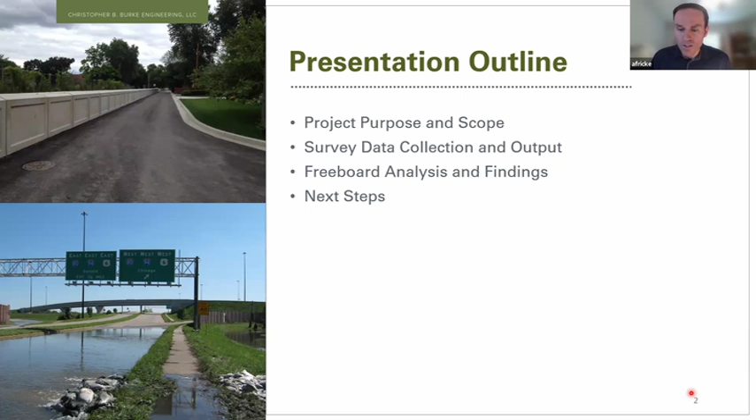First, I would like to discuss the purpose and scope of the project that we're doing for you. And then I will talk about the survey data collection and the information that we gathered from that. Following that, I will get into the freeboard analysis and our findings, and then talk about the next steps where we go from here. So first, let's start with the project purpose and scope.

The purpose of our project was to evaluate the levee system freeboard, or the height of the levee, with respect to FEMA requirements. We also wanted to collect data that could be leveraged in the future to apply for a letter of map revision, or LOMR, or continuation of the previous LOMRs with FEMA. As a reminder, a LOMR, or letter of map revision, is a process where FEMA revises the flood insurance rate maps to reflect the benefits of the levee.

It was mentioned earlier in the meeting that previous LOMR efforts that the Basin Commission has initiated have resulted in great benefits for the community west of Cline Avenue. Those communities are no longer subject to the mandatory flood insurance purchase requirements and development restrictions that communities must enforce as a participant in the National Flood Insurance Program. The East Reach levees east of Cline Avenue have not received a letter of map revision despite some of the past efforts, but there are ongoing efforts to try to achieve that.

The scope of our work included collecting and processing survey data for 30-plus miles of levee, and I'll show you a map on the next slide of exactly where we were working within the system. And then we performed a freeboard evaluation, which was a comparison of the actual levee height to the required height. And we've got some graphics to share tonight as well.

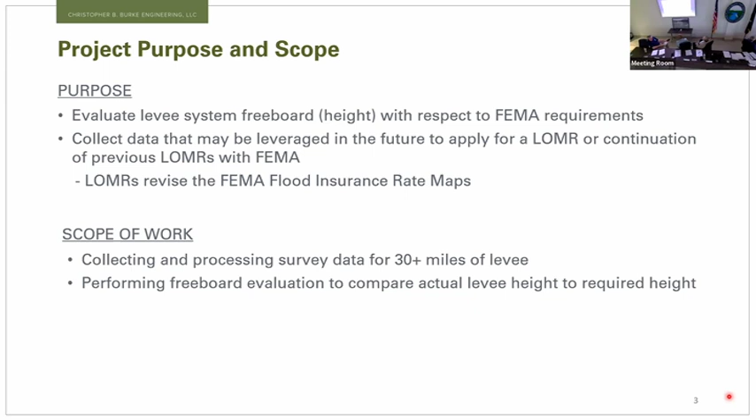So this map shows the Little Calumet River levee system in its entirety. As you well know, it extends from the Indiana-Illinois state line to the east to the interchange of I-80/94 and Interstate 65. All the levees are shown in various colors here, representing the different segments. Our evaluation included all segments, and I'll hover over them as I talk. We have the Hammond Forest Avenue segment, the Hammond levee, the Munster levee, the Highland levee, the Gary North levee, the Burr Street levee, the Gary South levee.

We also have the Marshalltown levee, and then a couple segments which the Army Corps refers to as non-project segments. These are segments that were constructed by others, or existed prior to the federal project, and those notably are the INDOT non-project segment at the interchange, as well as the railroad non-project segment, which is an extension of the Gary North levee that goes along the railroad here to the north.

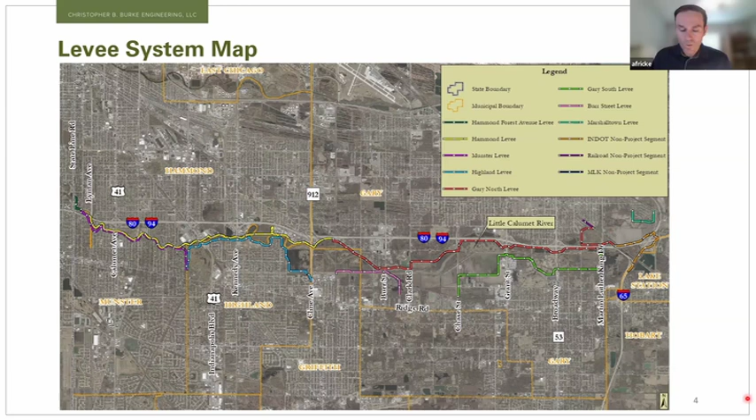Our survey data collection was performed using an unmanned aerial vehicle, or a drone, with a LiDAR scanner mounted to it, and it collected a dense cloud of points, a bunch of data, which we then screened through and extracted elevations at approximately 100-foot intervals, as well as areas of importance to us at road crossings, at transitions from levee to flood wall, and in other important areas.

The accuracy of our data was really, really good. With the drone, we can get accuracy up to about 1 inch, which is commensurate with and in line with ground survey accuracies as well.

One of the challenges that we encountered was how to present such a large amount of information in a meaningful way. We could easily see this information on our computer screens back at the office, but we wanted to know how best we can share this with the Basin Commission and with others. So we ultimately decided to share this information in 2 ways.

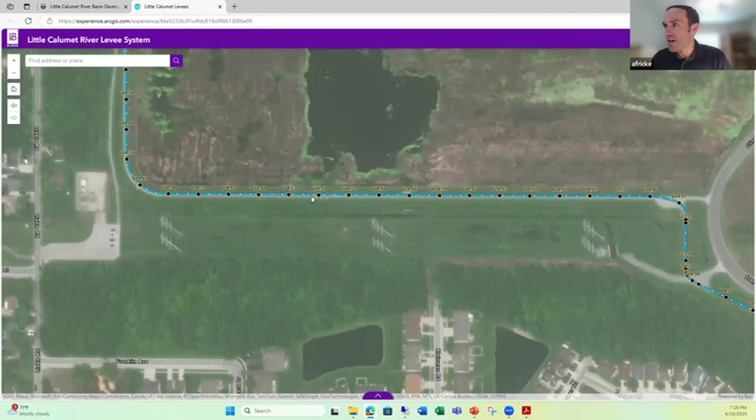And I'm going to attempt here to show you our online platform. If I can escape here and go to that. So this is the online platform, and you can zoom in to any location within the levee system. And I've just chosen Cline Avenue as a starting point, but you can peruse and go anywhere in this levee system, scan, pan, and you can see what the elevation of the crest of the levee is at anywhere within the levee system, all throughout the 30-plus miles from the Indiana-Illinois state line all the way to the interchange.

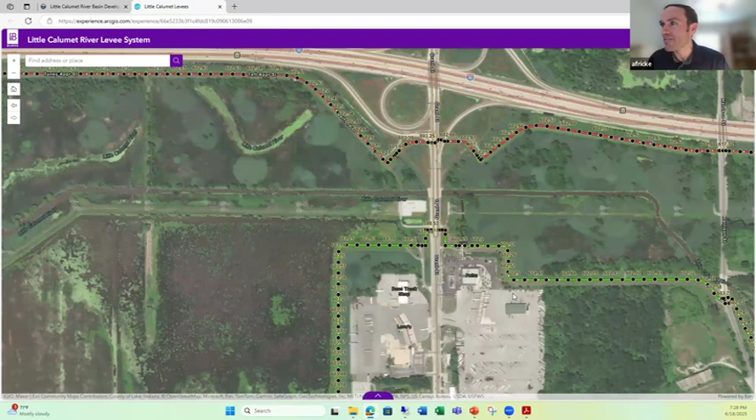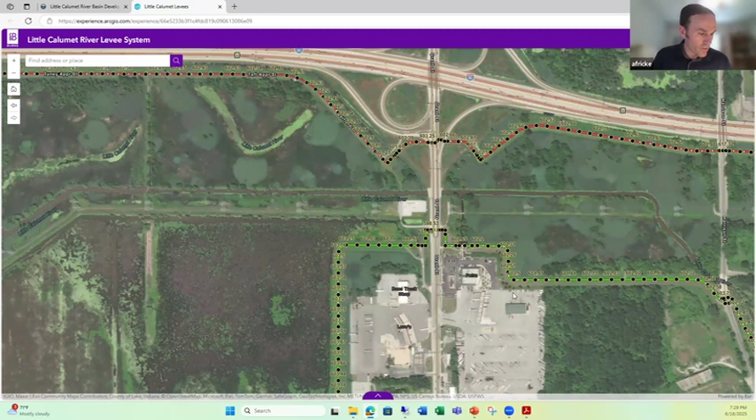So I'll just peruse a couple other areas here just so you can see the amount of data that's available here. Obviously, you have to zoom in to start seeing these points, but this is a very user-friendly platform that anyone with a computer and connection to internet can use. So we hope that this platform is very valuable to you, not only for this assignment, but also for the future, just having all this data available readily to you.

Oh, is that cool? Okay.

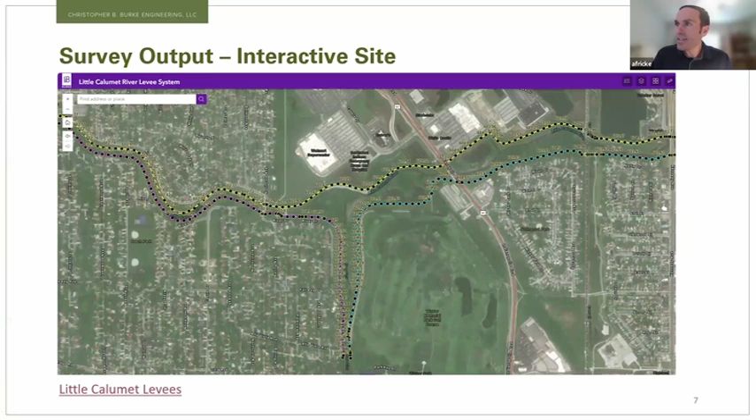And it provides a factor of safety and accounts for many of the unknowns that can contribute to higher flood elevations than we expect, such as debris getting caught on a bridge or some other factor that makes things worse than we expect. So we build in freeboard to levees in our designs to account for some of that uncertainty.

So when we look at the criteria that FEMA looks at for accrediting levees or recognizing them on the flood insurance rate maps, we have to look at the Code of Federal Regulations, specifically what's called 44 CFR 65.10. That's the section of the Code of Federal Regulations that deals with floodplain mapping. And we find when we look at that, that the freeboard is based on the 1% annual chance flood, or the 100-year flood event. This is a flood that has a 1% chance of occurring in any given year. So that's the baseline flood that we're looking at for FEMA purposes.

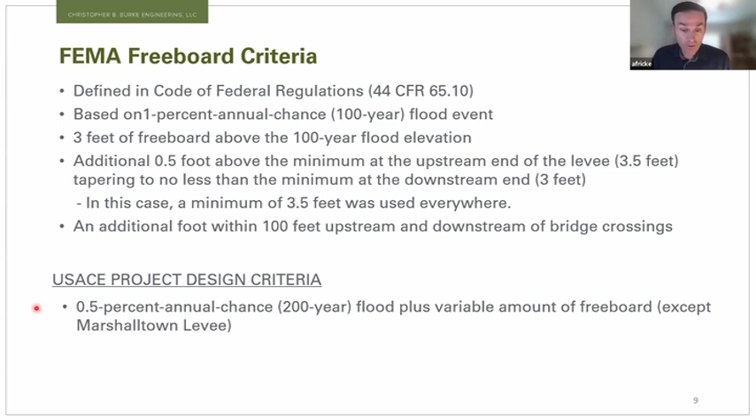I also wanted to point out that this assignment, we're looking at FEMA requirements because that's what drives the flood insurance rate maps. But I wanted to make it very clear that this levee system was designed specifically for Army Corps of Engineers requirements. And the design criteria that they used was the 0.5% annual chance flood, or the 200-year flood, plus a variable amount of additional freeboard. Generally throughout the system there, except the Marshalltown levee, that's a little bit of an exception. But I did want to point out that there were different criteria from the original design and the FEMA criteria that we look at right now for the levee accreditation.

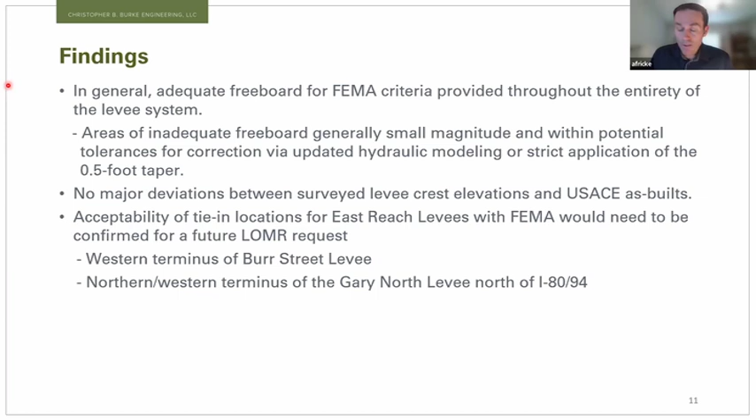Next steps and conclusions here. This is my last slide, and I'll be glad to open it up to any questions. But we are currently authorized by the commission to perform a two-dimensional hydraulic analysis of Little Calumet River. This will serve as an update to the existing flood elevations. This model is expected to be more accurate than the current flood elevations. So what we want to do when we're done with that work is to update those freeboard profiles for each levee segment using those new flood elevations. And based on that information, we'll then provide specific recommendations for any improvements that need to be made to address any freeboard deficiencies for the FEMA requirements.

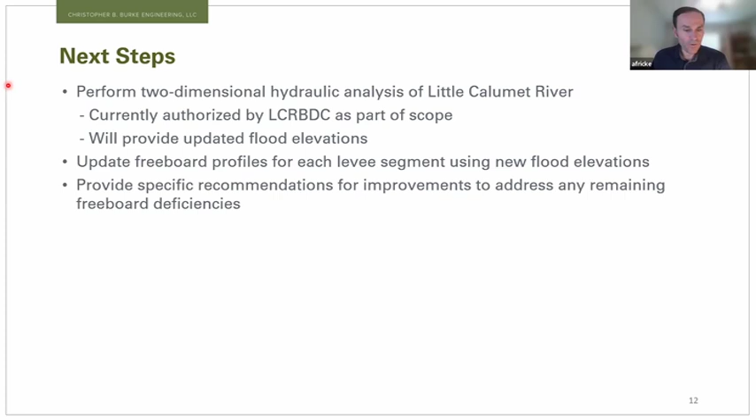So we're hopeful that the new flood elevations will be at or below the current flood elevations. We're keeping our fingers crossed for that. That would certainly be a good sign. But we'll cross those bridges when they come, and we'll update those profiles when we get there. But overall, good news that the levee system meets the height requirements for FEMA for the vast majority of the system.

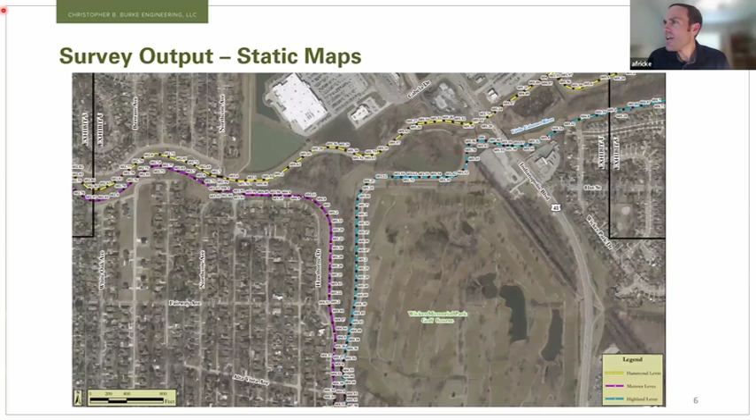Okay, thank you. The second one, terminology: you used the term dense cloud, and I guess that ties to the every 100 feet or so. Is there another, less dense, sparse cloud that you could use? And what's the difference in accuracy that we would get? So let me go back to that slide. I'm not sure the slide will help answer your question, but when that drone flies along the levee, it's continuously collecting elevation data as it flies.

So it's shooting down, information's going back up. So it's collecting a very dense point cloud, if you want to call it that. That might answer my fourth question. And then we get a lot of information that we have to sift through a little bit to make sure that we're extracting the useful information, because not all that data we really want, but we're collecting it as we're going along. Okay.

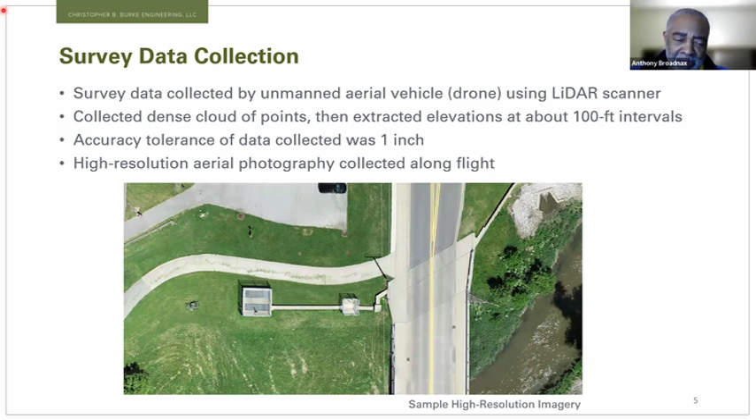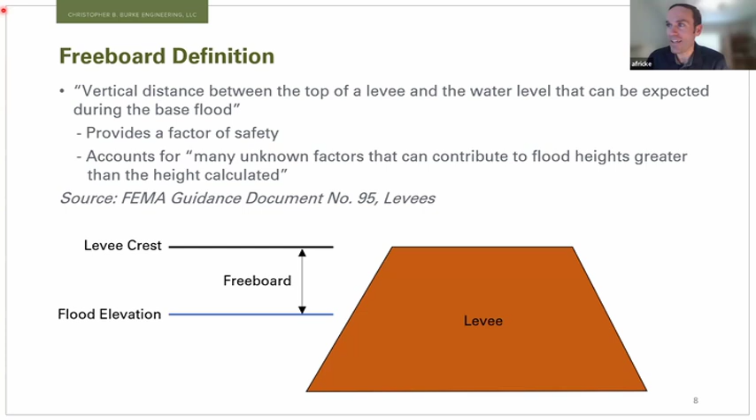That's a really good question, and I'd like to clarify that not only the earthen levees are included in this, but also the flood walls. So that was one of the areas where we really had to sift through the data, because the levee crest on an earthen levee is much wider than the narrow top of the flood wall. But we indeed were able to get the top of flood wall elevations as we went along, and you do see those ups and downs.

Okay, thanks. And the last one: you mentioned a couple times transmitting the information to us or others. I forget sometimes we're public, but when I hear that in my private work, I'm thinking, wait a minute, this is our data. Who else would you be communicating this information to? Or is that just a general acknowledgement that we may want to share it? Or is there a plan to share this information with somebody else?

Yeah, it's just a general acknowledgement that if you want to share it with others, you have the ability to do that with the link that we provided you. It's not a private connection. We haven't sent it to anyone else other than you, but you can share that with others if you so desire. Perfect. I don't have any more questions, Mr. Chairman. Thank you, AJ. Anyone else?

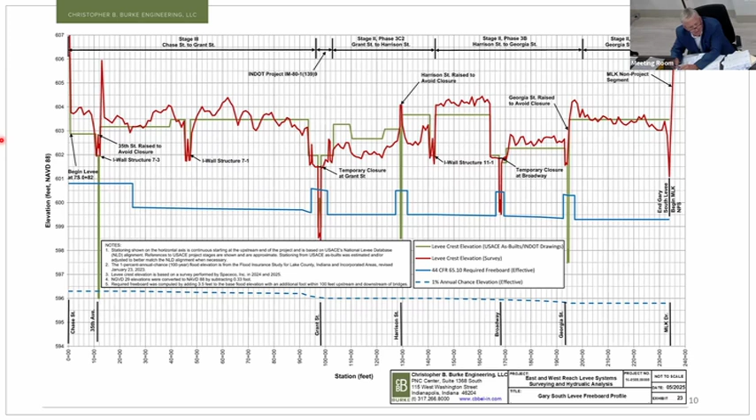Thank you. Yeah, because if there's ways to do it, especially of the snapshots, for lack of a better term, because I'm old, where those locations are, because in some of the more remote areas that becomes more and more prevalent as we try to see before and afters. Yes, sir. Thank you. Make that happen.

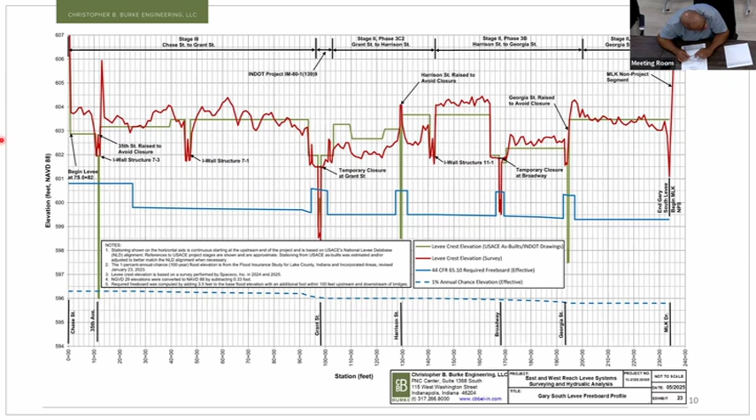Chair, just one more question. Yes, sir. You can go. No, go ahead. I thought he had a question. Oh. Go ahead. Great presentation, by the way. Mine is simple. Maybe you know the answer to this, maybe you don't.

When you guys start your borings, what do you plan on doing with the material that you bore and drill? Yes, so a geotechnical investigation is planned for the levee. We're still trying to work out the details with the U.S. Army Corps with the Section 408 permit, as Mr. Repay alluded to earlier. So the exact plans for the disposal of those materials are still to be determined. But we probably need to find a location near the levee to dispose of those cuttings. And you're just waiting for clearance from the Army Corps? Yes, we need permit approval to commence the work. Okay, thank you.

Mr. Chair, I have a question. AJ, for the green lines and the anomalies at 35th, what do you guys attribute that to? Yeah, great question. 35th Avenue is an interesting one here. That's one of the locations where the Basin Commission came in after the federal project and raised the road profile in that area. So that's why there's such a huge anomaly there, from the green line to the red line, because there was a project that was initiated after the green line plans. That's why we're not seeing as much of a correlation there.

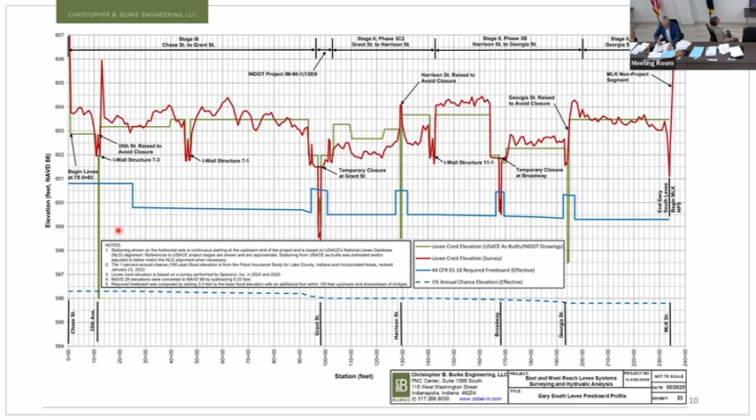Thank you. Dan, is that where the Corps was basically planning for 35th to flood as part of the project? So no, 35th, remember, had the panels that were stored in the old fruit shop. And then the same for Harrison, where we rebuilt the bridge. Those are all closure structures where we had to put the 33,000 sandbags. So when we raised Georgia and Harrison at 35th with the panels, that's why the as-builts show so low. And now the red, where they flew it over, shows where it is now, so we don't have to close that area. So the only closures in Gary that we would have are Grant and Broadway.

And I don't think that shows up here, does it? Yeah, here you go, Dan. You can see we're showing those temporary closures right here at Grant, and then Broadway is also over here. But you're exactly right. Georgia and Harrison are very similar to 35th, where you have these big spikes in this green line, but the Little Calumet Basin Commission has initiated projects there since the as-builts were created.

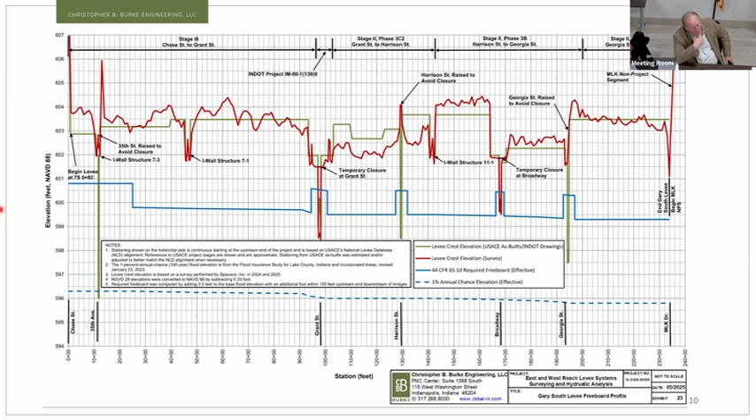Mr. Wishlinski. Touching on what Commissioner Whitaker was asking, when you do the borings, obviously you're still going through the approvals from the Corps. Are you going to inject those holes with slurry or some sort of cementitious material after you take the boring? Yes, those borings will likely be backfilled with a bentonite material, bentonite grout or bentonite chips. We're still ironing out the details on that, but that's typically the backfill that is used in these types of applications.